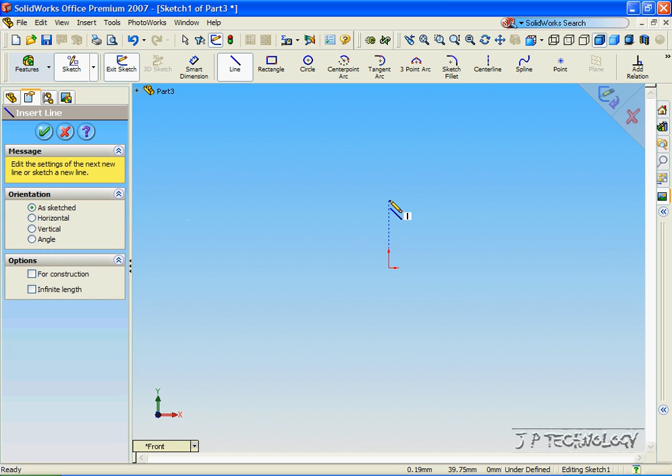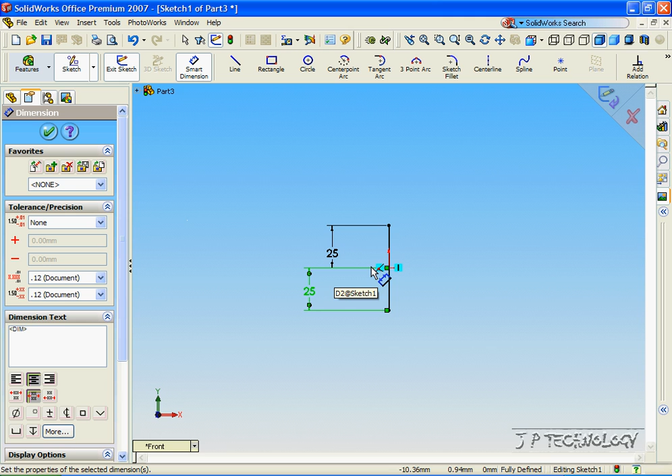So to start off, let's draw our sphere. Click Sketch, click Line, click Front, and from the origin, when we have the dotted blue line, draw a line straight down. Now with the Smart Dimensioning tool, let's make it 25 millimeters from point to the origin on each side. This is important as we're going to draw a sketch on the origin line here, and it has to be able to extrude up onto the surfaces equally.

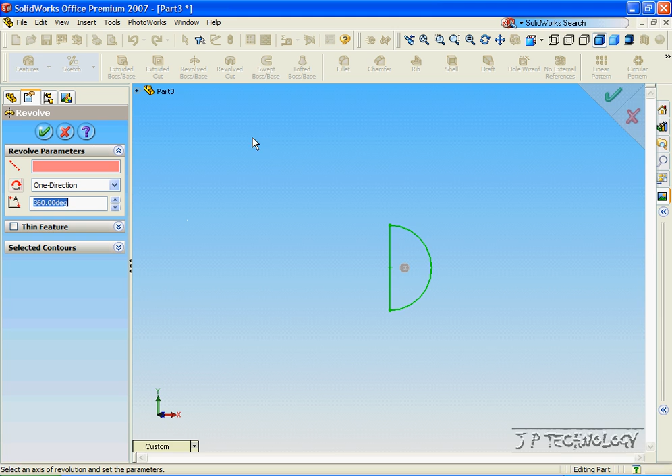Now let's click 3-point arc, click this point, and pull it out until it's at 180 degrees. Click OK, click Accept, and now we're going to click Feature, click Revolve Base. For the axis, click the line here, and it's going to revolve around and create a sphere. Click OK, and now we have our sphere.

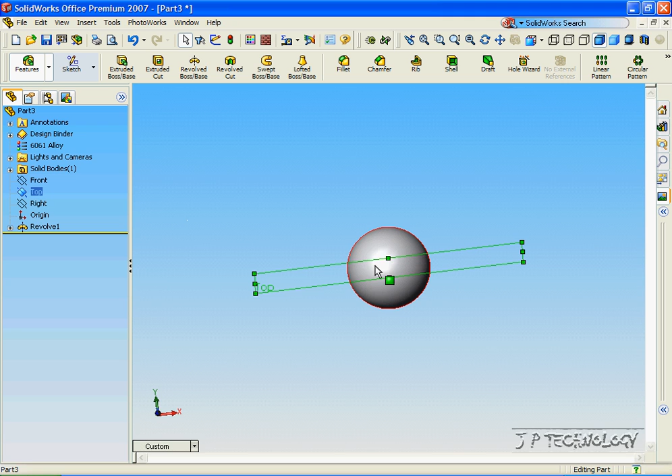So let's click the isometric view, and let's sketch onto the top plane. If we look from the top plane, we're going to be sketching into the middle, and we're going to be making the images go on the top and the bottom. So let's look at the top.

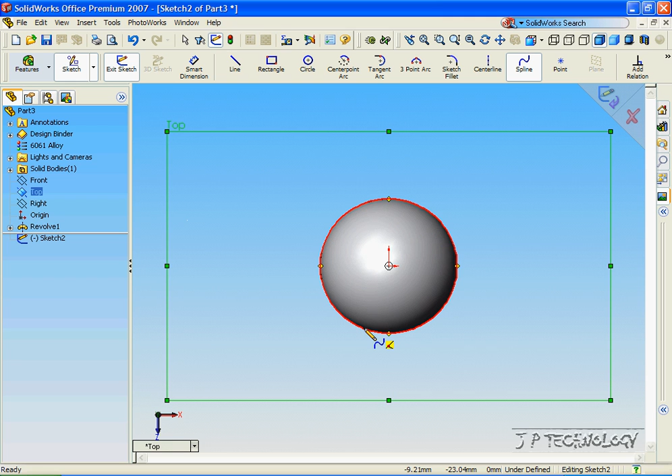Let's click Sketch, click the Spline tool, and let's sketch a pattern that kind of looks like the seams on a baseball. So what we're going to do is start off by highlighting the red outer area of the circle, and that's going to be a coincident point, and we have to have this to make an equal sketch on both sides to meet at a point.

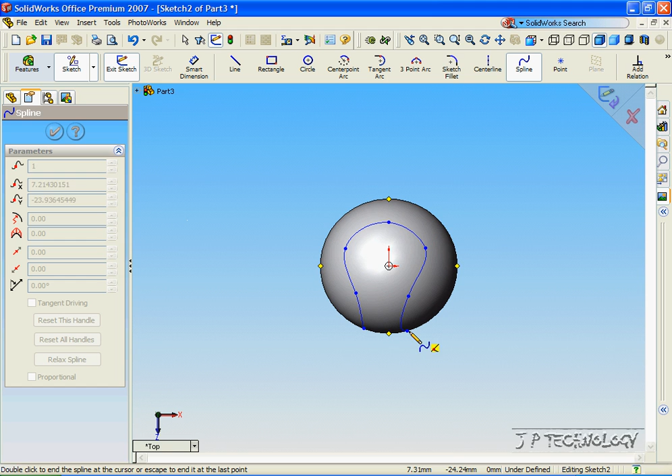So let's start off there, click it, and now just freehand what the stitching on a baseball would look like. You need to end it by highlighting or making a coincident point on the outside line. You'll know that you have the coincident point when that yellow feature appears on your drawing. As you can see, as I go to the edge, the yellow feature appears. So click it, click OK, and now we have our sketch.

Now if we look around, the sketch is inside, it's in the middle, and we're going to make it go up and down, and it's going to look like seams on a baseball.

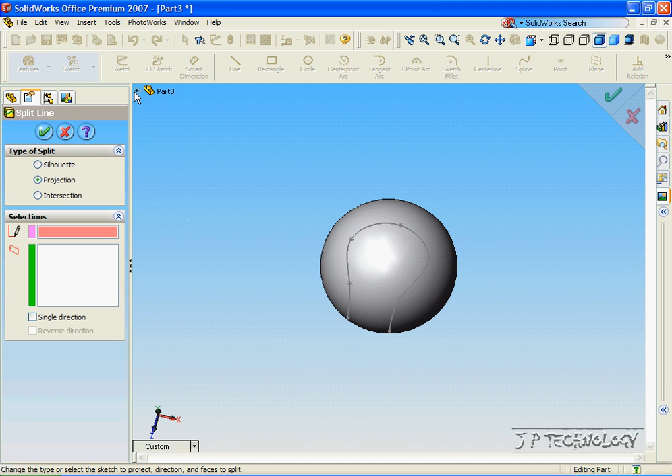So let's click Insert, click Curve, click Split Line. Now what we have to do is click the sketch that we're going to use. So let's open up the tree, click Sketch 2, and the surface. Let's just click the surface of the ball, click OK, and now you can see that our drawing that we first created is now on the ball, on the surface, on the top and the bottom.

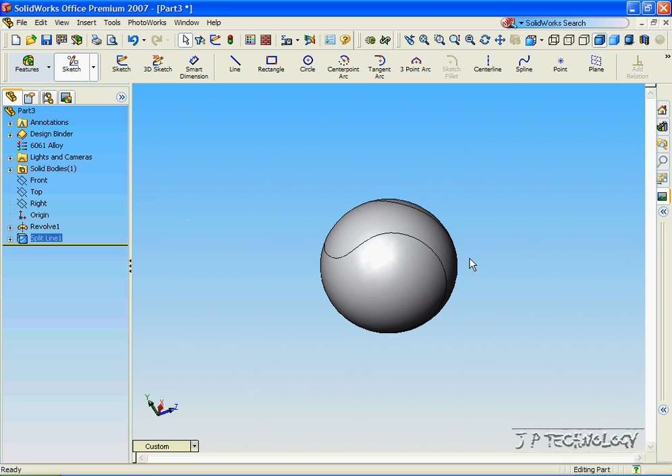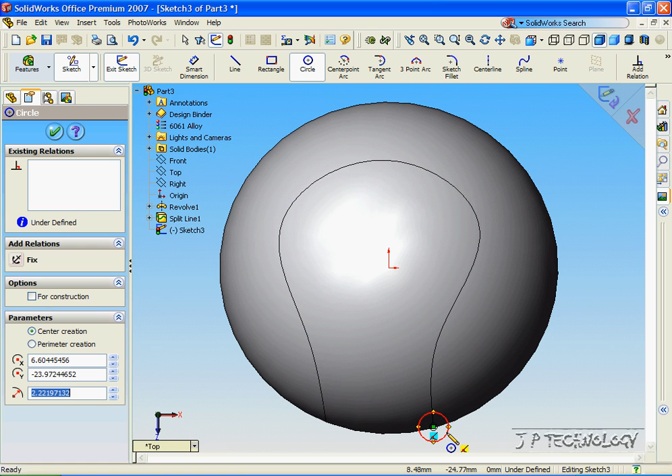Now let's extrude out these lines that we just created to make it look like seams on the baseball. So let's click the top view, click the top plane, click Circle, and on this sketch that we just created, go to the very edge, and let's draw a circle. Let's make the radius 1.5 millimeters. Click OK, click Accept.

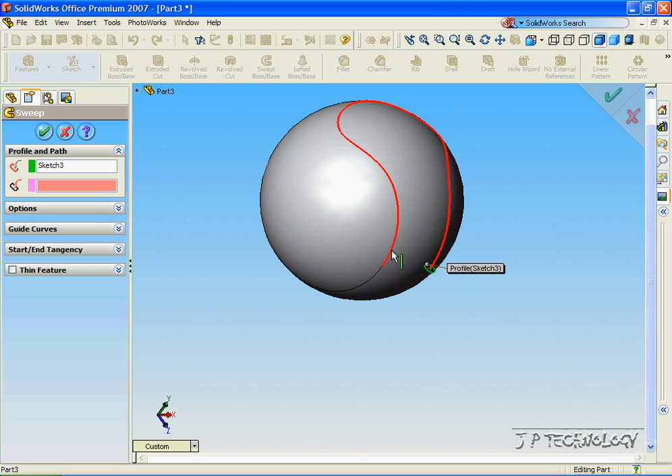Now go to Feature, click Swept Boss, and let's choose the drawing we just made, and then choose the seams. So let's click the top seam. Click Accept, and now we've made the top seam.

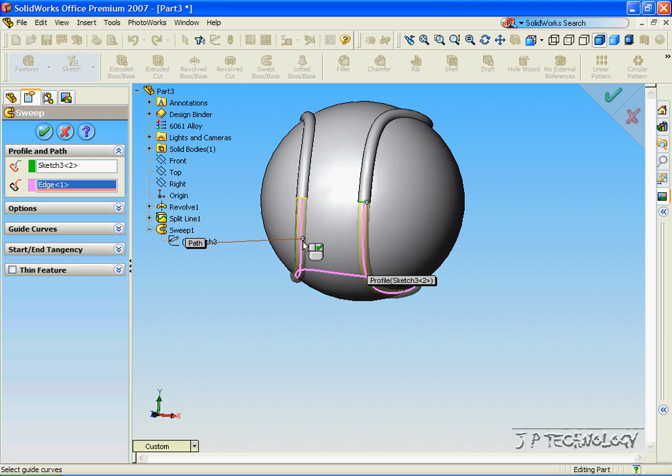Now we can do the same for the bottom. Click Swept Boss. Open up part 3, open up the first sweep, click that sketch, and we'll click the bottom sketch, click OK, and now we made the bottom half.

So now we're able to, from a drawing that we made, a 2D drawing inside, make it 3D, and then we extruded from that 3D. So now we made what resembles a baseball with the stitching. And this concludes our tutorial on how to use the split line within SOLIDWORKS.